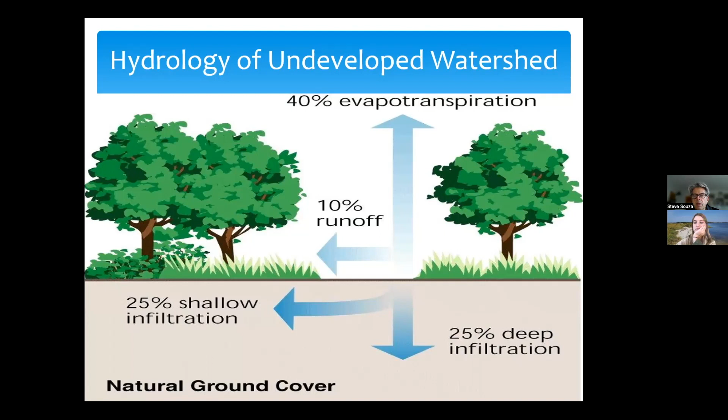You've probably heard us talk about this numerous times before, that when we have relatively undeveloped watersheds, the majority of precipitation that does fall is either infiltrated or lost via evapotranspiration. Very little of that ends up getting generated as runoff. But as we start to develop our watersheds, we end up increasing the amount of impervious cover. That in turn results in less of that precipitation making its way back down into the ground, so a significant decrease in the amount of infiltration and a significant increase in the amount of runoff. And neither one of those things is good for Barnegat Bay.

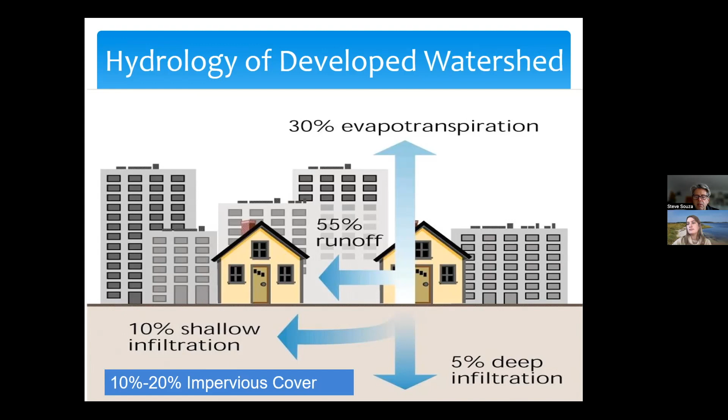Now, some of you may think, well, okay, I need to have really high levels of development to start seeing this, things that you would see typically in more urbanized areas like, say, Toms River. However, that's not the case. This occurs even with as little as about 15% impervious cover, which is on the same level of development as maybe one house to two houses per acre. So typical suburban development, the type of development that we see quite common throughout the entire Barnegat Bay watershed.

So there are various strategies that a lot of you are familiar with in terms of managing runoff. These best management practices, or BMPs, can be divided into three different types of categories. We have gray stormwater, which would be the conventional standard technique, the curb and gutter, where we collect it, we detain it, and then we discharge it, but we don't really do much in the way of managing any of that runoff. Then we have green stormwater best management practices, the type of practices that we've been promoting in Barnegat Bay for the past 20, 25 years or so.

We're really focusing on collecting runoff and keeping it on site as long as possible, either to infiltrate it, to passively treat it through some type of biological process, or maybe even store it and reuse it in some capacity. That ends up providing us with a really great way of reducing runoff volume, decreasing storm surges and the erosion that's associated with that increased rate of runoff, and also removing pollutants.

But there's another category as well, these green-gray stormwater BMPs, which is sort of a hybrid. We're incorporating some of both the gray technology as well as the green technology. And porous pavement falls into that category, a green-gray type of stormwater management best management practice.

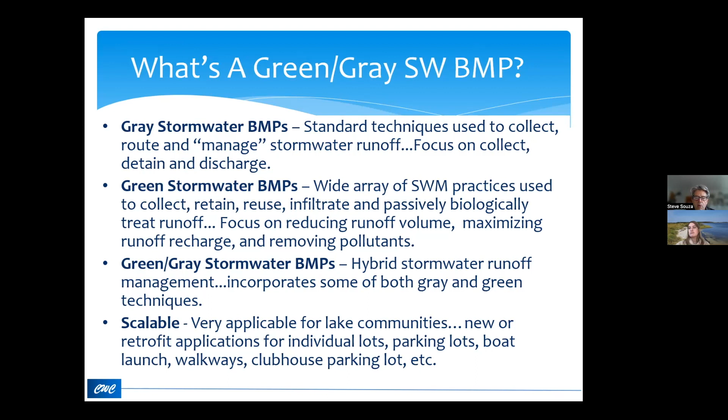So let's take a look at porous and permeable pavement. These technologies have been around for a long time. In Europe, they've been utilized for close to 50 years. And here in the US, definitely over the past 30 years or so. And more so, maybe in the past 10 to 20 years, we're seeing an increase in the use of these types of pavement systems in the more northern portions of the country: New Jersey, New York, Pennsylvania, and New England.

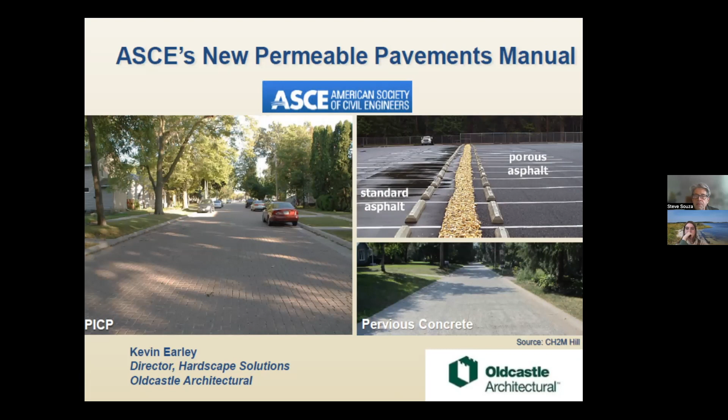There's a variety of different sources of information out there. Within this presentation, I'm providing you with a few. The American Society of Civil Engineers has come out just recently, this document's maybe now about 3 years old, with a manual that deals with all different types of porous pavement, whether it's concrete, asphalt, or pavers. And that's a good starting point for both engineers and for lay people to understand more about what is porous or permeable pavement. Basically, it is the paving material that has the function and structural support that you would associate with conventional pavement, but yet has the ability to infiltrate stormwater runoff.

So it's paving material. Let's think of it with pores that actually facilitate the passage of precipitation from the surface into the ground. In many cases, we can end up with a net positive impact when this is done correctly, in terms of a reduction in the runoff volume. That in turn reduces the amount of pollutants being conveyed. Less volume means less pollutant loading, and that also means less rate, because if we have less volume and it leaves our site more slowly, we've also tamed some of that rate that causes problems with erosion, bank instability, etc.

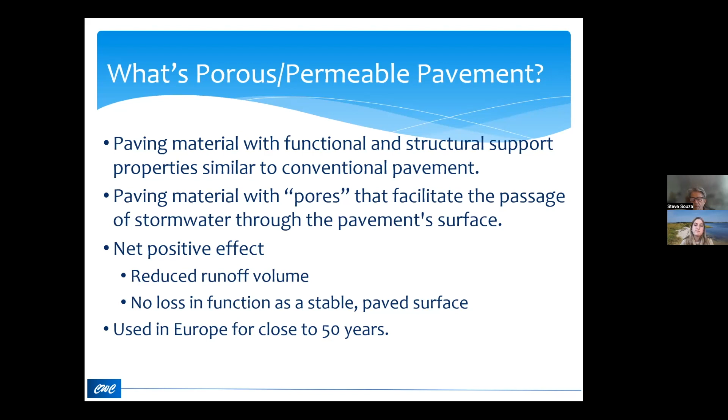At the same time, with the correct application of porous and permeable pavements, we can still have no loss in the functionality of those paved surfaces or the stability of those paved surfaces. And as I mentioned previously, in Europe, these applications have been implemented for 50, 60 years. There are a variety of different types of permeable pavements. I'm going to talk primarily about 4 different applications: porous concrete, porous asphalt, pervious pavers, and eco pavers.

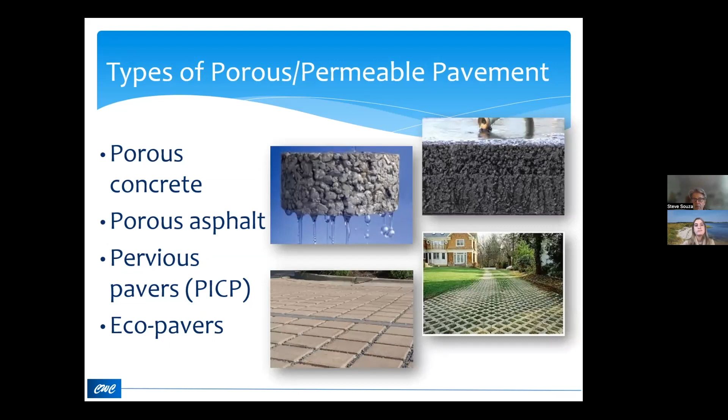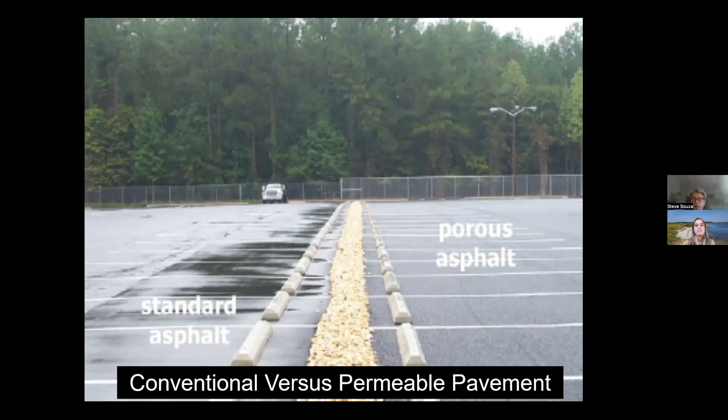The difference, and probably a lot of you have seen slides similar to this, but the difference between conventional and permeable paved surfaces lies mostly with what happens during a rainfall event. On the left-hand side, with conventional pavement, you end up generating more runoff. That runoff leaves our sites faster. There's more contaminants that are mobilized and transported, and there's less opportunity for any of that runoff to get soaked back down into the ground.

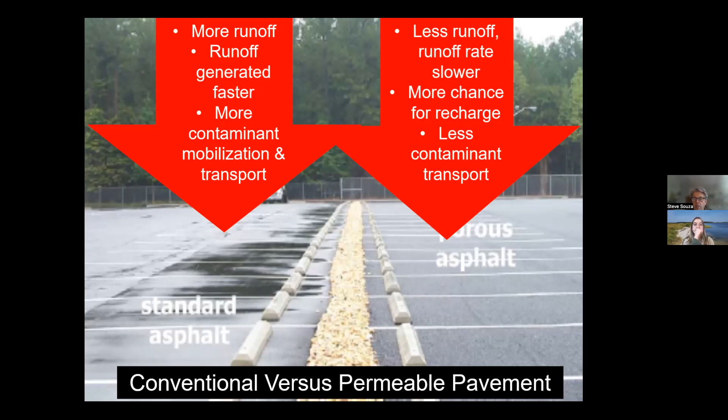On the right-hand side of the slide, you can see this is a portion of a parking lot that has been paved with porous asphalt. You don't have any of that standing water up on the surface. As a result, we have less runoff, because some of that precipitation is soaking down through that pavement. We're generating runoff at a slower rate, and we're increasing the amount of infiltration, so that means we have more chance for recharging the surficial aquifer. The combination of all of that results in less contaminants being mobilized or transported off-site into Barnegat Bay.

Permeable surfaces or porous pavement surfaces can be constructed either with an underdrain or without one. If I have a shallow depth to bedrock or shallow depth to groundwater, less than 2 feet, I'm going to want to construct with an underdrain. That underdrain does facilitate how that porous pavement operates, but it doesn't take away substantially from its overall functionality with respect to reducing volume, rate, or pollutant removal, because typically you would end up taking the precipitation collected by that underdrain and shunt it into maybe a small rain garden or some other type of treatment area.

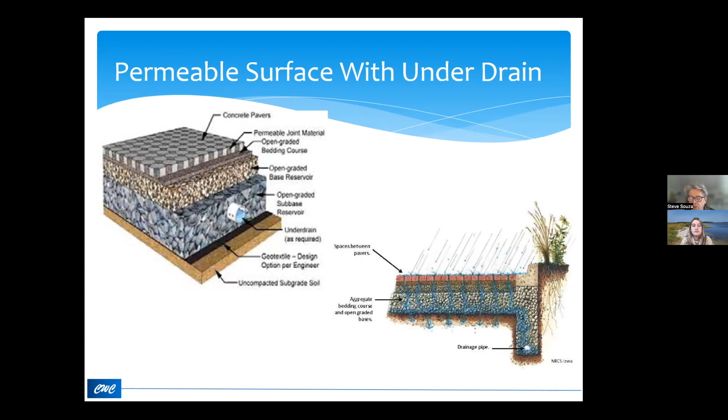If I have proper conditions, I can build my porous pavement site without any type of underdrain, so I'd have ample distance, at least 2 feet from bedrock or from the high water table. As a result, all of that precipitation that passes through the porous pavement and then down into the ground is part of what ends up recharging the surficial aquifer.

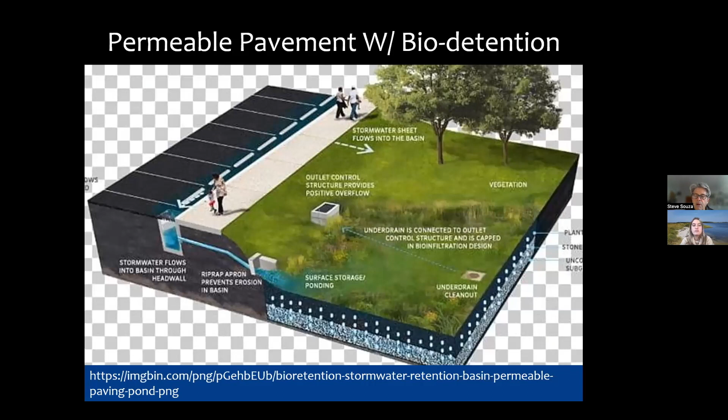As I mentioned, we can do this in very urbanized areas, even areas where I have shallow depth to bedrock or groundwater, by using a combination of my porous pavement with an underdrain and then routing that collected runoff intercepted by the underdrain into some type of biodetention area, whether it's a small rain garden or some other type of vegetated basin. Now, one thing to keep in mind is that all of these techniques, with the exception of the eco pavers, all have shared construction and installation attributes, whether we're talking about porous asphalt or porous concrete or the permeable pavers.

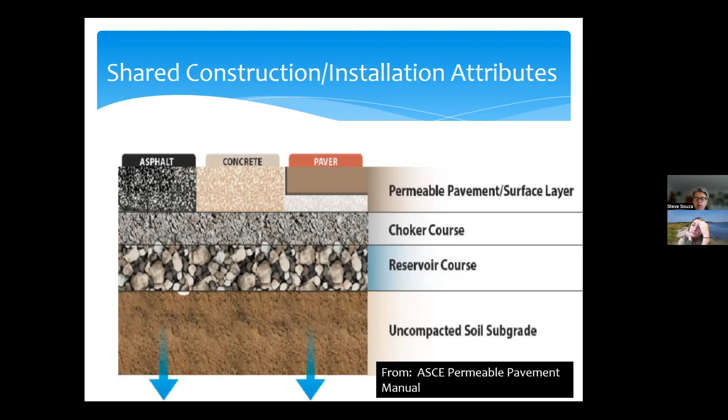Essentially, you have your surface, which would be the asphalt, concrete, or paver, that sits over what's called a choker course. This provides stability to that upper surface, and then a reservoir course that provides the voids within which water can collect and be trapped. Think of it almost like an underground detention basin. From there, that water slowly filters through that reservoir course into my natural native soils, or is collected by the underdrain and then shunted to some type of biotreatment area.

In terms of the thickness of the surface, whether we're talking about porous asphalt or porous concrete, the material itself isn't that different, and neither is the upper layer. It's really the thickness of the choker layer and the reservoir layer that increases as the intensity of use increases, going from a parking area servicing only cars, to a residential street, or even a cartway over which heavy trucks travel regularly. What really changes is not so much the surface layer, but the subsurface layers, so there's commonality with respect to construction and application.

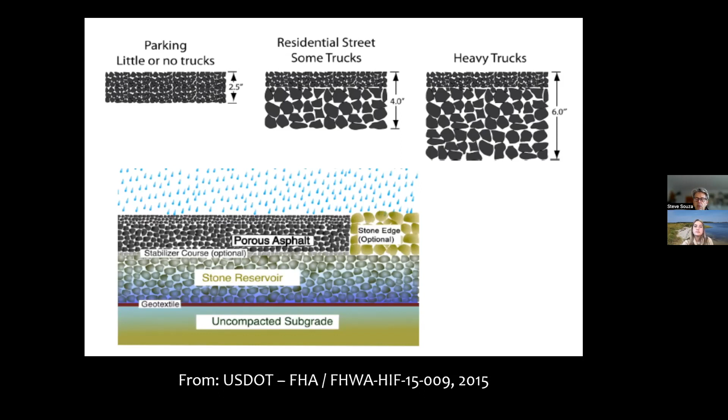At the end of the day, what we're really trying to do, which benefits Barnegat Bay directly, is reduce the amount of runoff we're generating. Less runoff reduces flooding and pollutant loading, and can also allow downsizing of the ancillary BMPs operating in concert with that porous pavement, if implemented as part of a restoration or retrofit application.

I can also decrease the heat island effect, because as precipitation filters down through that upper layer and gets contained and held for a while in the subsurface layers, that helps dissipate heat, so you have less of that urban heat island effect. It's been shown in colder weather environments that you end up with less development of black ice or ice in general, so you have less slip and trip type accidents, and a safer surface.

As mentioned previously, it can be scaled for a variety of projects, whether heavy truck utilization or just nominal use, like in a driveway. Some applications involve recycled materials, and there's a lot of data now showing the service life is very similar to conventional pavement. For those needing LEED credits, porous and permeable pavements do provide value toward achieving LEED accreditation, and this can be done in both cold and warm weather climates, and can be more attractive than standard paving.

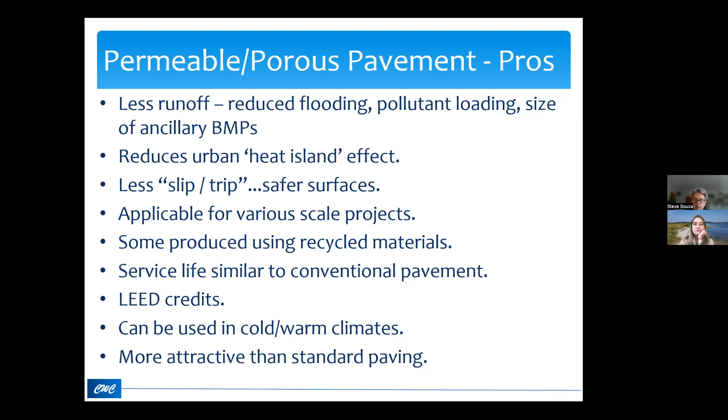Some of the cons, where we see pushback, is a lack of public acceptance, which I think has to do with preconceived notions that these materials are not as stable or will break down more quickly. There's also the fact that initial installation may be a little more expensive than conventional surfaces. They also need special maintenance to prevent clogging, which adds a bit to the long-term cost of these systems.

In high traffic areas, you may find you don't get the longevity of a conventional surface. However, with improvements made over the past decade, we're seeing the longevity is about the same between porous pavement and conventional surfaces. As mentioned before, the application of these techniques may not be suitable if there's a very high water table, or if the soils are very subject to shrink, swell, or frost heave conditions, which is typically indicative of soils associated with a very high water table.

When we use these techniques, particularly porous asphalt and concrete pavement, they need to be installed by experienced contractors. What I've also seen is that because of concerns about longevity and public acceptance, municipal engineers or planning board engineers are often leery about using permeable or porous pavement surfaces.

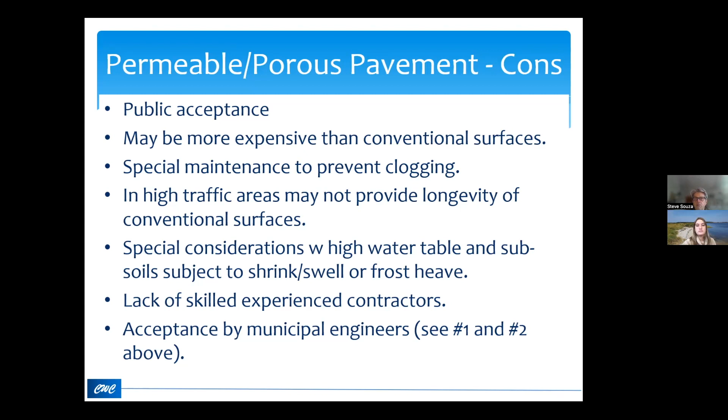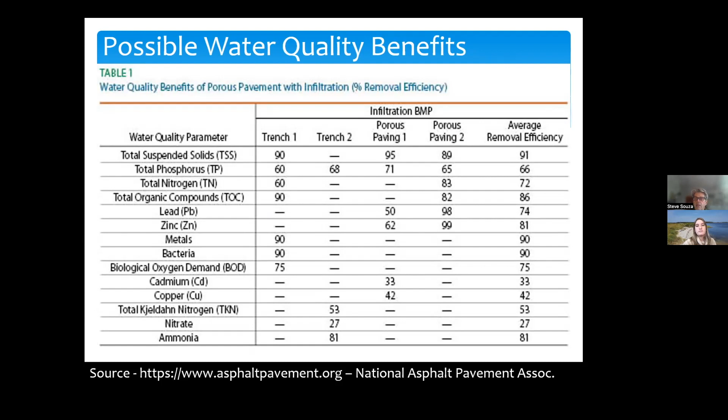There are water quality benefits. This is a table from the National Asphalt Pavement Association, so this isn't coming from some enviro group. This is from the National Asphalt Pavement Association, showing that porous pavement does have the ability, much more so than conventional paving, to remove pollutants as well as infiltrate a lot of that precipitation.

Comparative costs right now are based on 2019 to 2021 data. The material cost for permeable pavement is about 10 to 20% more than conventional surfaces, some of which has to do with transport.

There are not as many sources for this material, so that adds to the cost. The base excavation and preparation costs, though, are very similar, and in some cases could be even less for permeable pavement compared to conventional pavement.

So the offset that I see, and I've seen in applications, particularly an example we'll talk about a little bit later, is that because I'm increasing the amount of precipitation I'm infiltrating into the ground, I'm generating less runoff, so I need a smaller ancillary detention basin or other type of BMP to help manage that runoff.

Now, granted, the maintenance costs tend to be a little bit greater for permeable pavement because they have to be inspected and swept on a regular basis. But accounting for all those added stormwater management costs, permeable pavements tend to be more economical over a 20 to 30-year life cycle than conventional pavement. That information is from a recent report, 2018, that you can check out for yourselves.

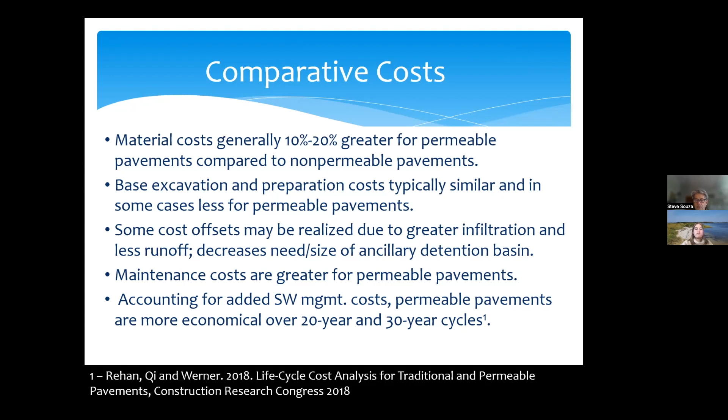So let's talk about the different types of porous and permeable pavements, and then we'll get into an example of application within the Barnegat Bay watershed.

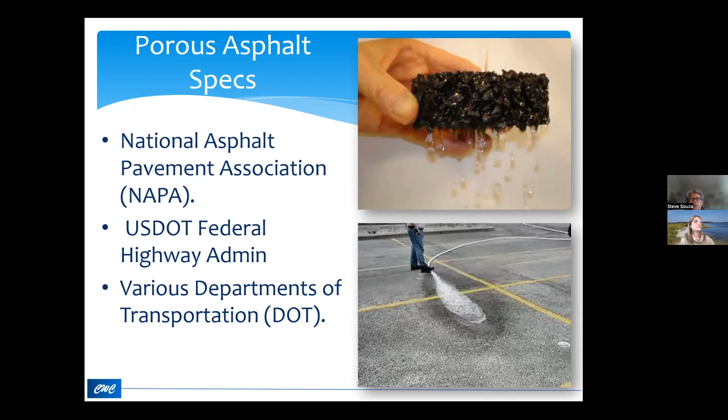There are a variety of specifications for porous asphalt applications, depending on whether it's being used for roadways, driveways, or for parking lots. These are just three different sources for those specifications.

Permeable concrete, again, widely used, I would say probably more so on walkways, small scale parking areas, things along those lines. Essentially, this is high porosity concrete. It does allow for the passage of rainfall into the subsoils.

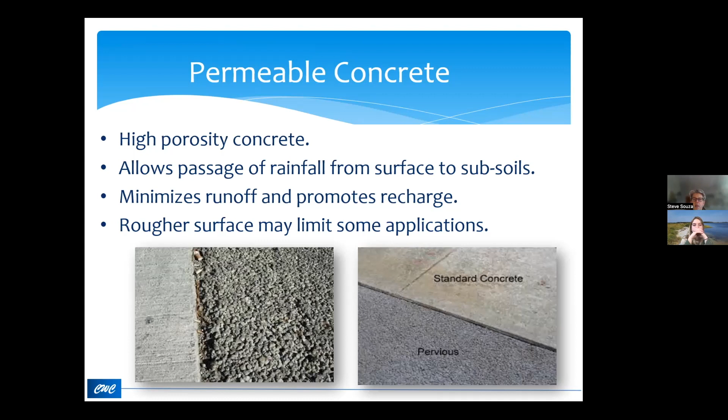The difference here, and you can see this in these two pictures at the bottom of the slide, is that the permeable concrete has a little more of a rough surface than standard concrete, and that's where you may get some public acceptance pushback, because it's a little bit of a rougher surface and it doesn't look perhaps as refined. However, it does have its place in development and redevelopment applications.

Again, similar to the porous asphalt, there are a variety of sources of specifications. This is just a couple of examples, but US DOT, New Jersey DEP, they do provide specifications not only for the material itself, but how to install and maintain those surfaces.

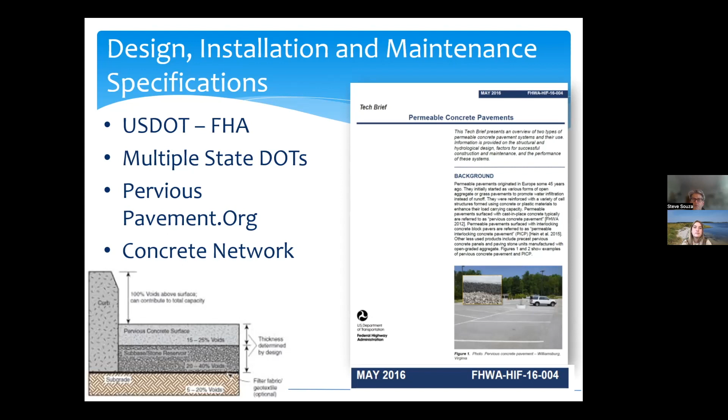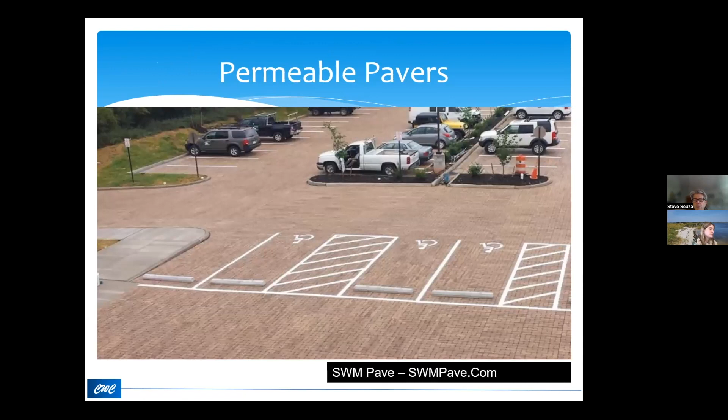And then we have permeable pavers. A lot of you are very familiar with permeable pavers. We've seen a variety of applications, whether it's on walkways, sidewalks, patios, and in this application, even being used in a large parking lot.

As I mentioned, a variety of applications, these can be in a lot of situations. You may have some grass growing between the pavers, or the space between the pavers is filled with some type of additional aggregate. Typically, they are cheaper than standard concrete, but because of the type of application, costs, and labor associated with it, their installation costs may be a little bit higher than standard concrete. They tend to be more expensive, though, than macadam.

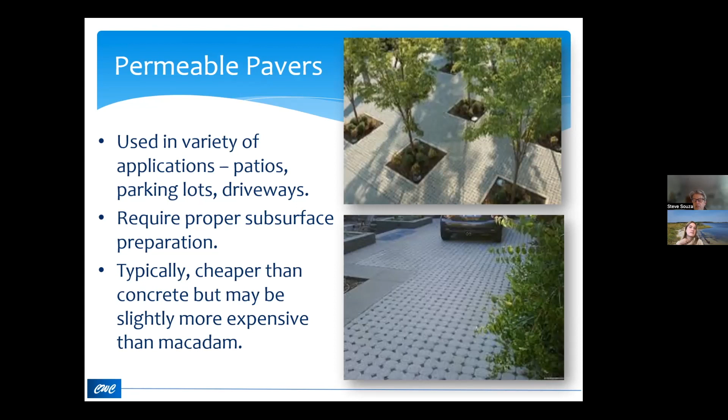However, they do have their place, particularly, I feel, in patios, parking lots, public areas, as opposed to conventional concrete or macadam.

So I'm going to share with you a case study. This is a project that was done at the Toms River Board of Education for the American Littoral Society. Funding for this project was provided through New Jersey DEP's 319H funding program. The scope of the project was to basically demonstrate the benefits of porous pavement, and this is a relatively small scale project, but was being done on a demonstration basis.

Here we had the opportunity to remove 8 conventional macadam parking areas and replace that with a porous concrete. The cost of this project was about $20,000, not extremely expensive, and that included the removal and disposal of the macadam.

Post-installation infiltration rates, we were getting greater than 10 inches per hour, which is about equivalent to the 500-year event. That means I could have this massive storm event and it would be generating no runoff at all. All of that was passing right through that porous concrete surface.

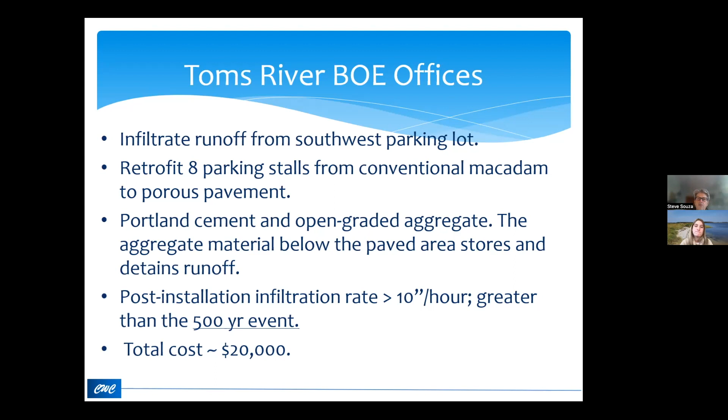This is the site, and those are the 8 parking stalls that were modified.

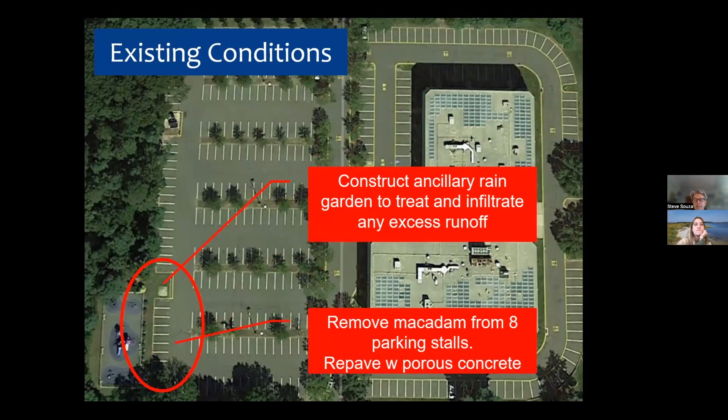We also constructed a small ancillary rain garden to treat any excess runoff. This ended up being sort of like a belt and suspenders application, and in this case wasn't really needed once we did the post-application testing of the new surface.

So we start off with the removal of the macadam, and then the preparation of the base. A big portion of the work being done on retrofit type applications is to loosen up all of that previously compacted soil.

We want those native soils, in this case, which had very high sand content. Naturally we're getting over 10 inches per hour of infiltration. We wanted to loosen all that back up and return it to as close as possible to its natural condition, both in terms of porosity as well as bulk density.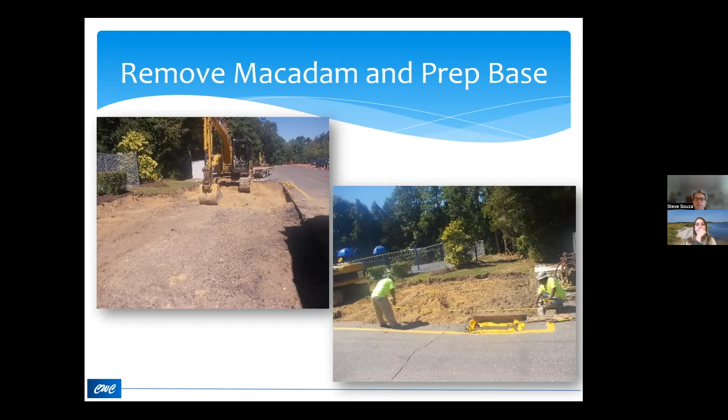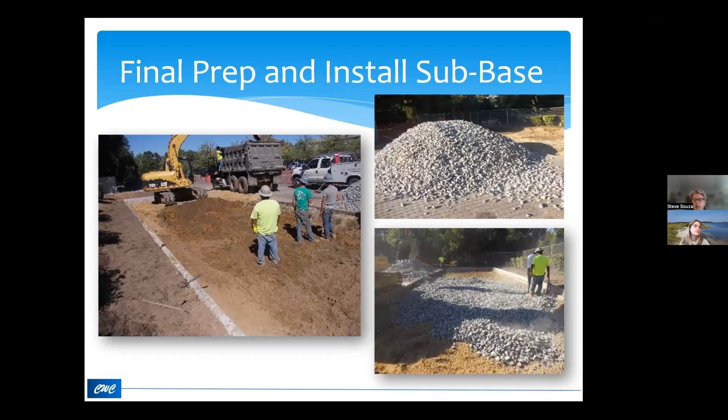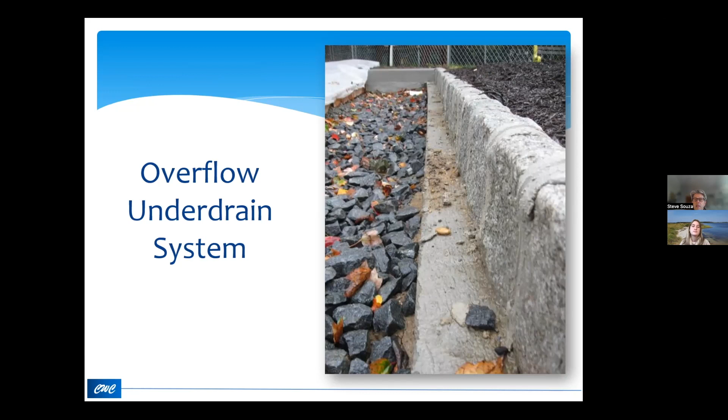Once we had the base prepared, we came in and put that choker base and reservoir base over the bottom of our native soils, again being very careful not to compact those native soils. In this case, since this is being done on a demonstration basis, we did create an overflow underdrain system, but as I'll show you, that wasn't really necessary in this situation. It was included as part of the overall project.

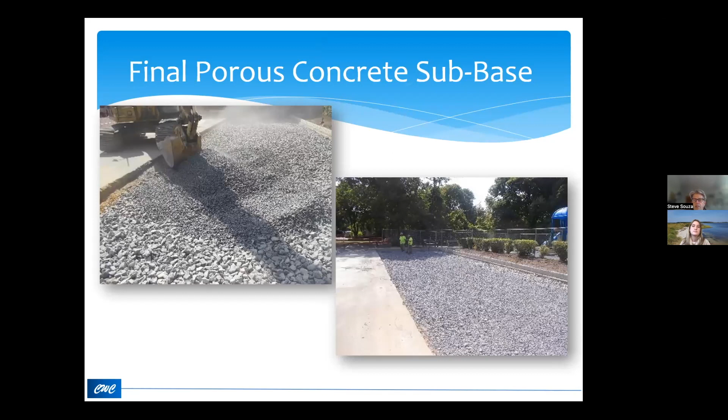Once we had our reservoir base, which is the larger aggregate, we put on top of that our choker base, and then started to lay over that completed sub-base our porous concrete surface. Here's the material being laid out. Once it's in place, it's covered and allowed to cure for roughly about 72 hours or so, depending on temperature.

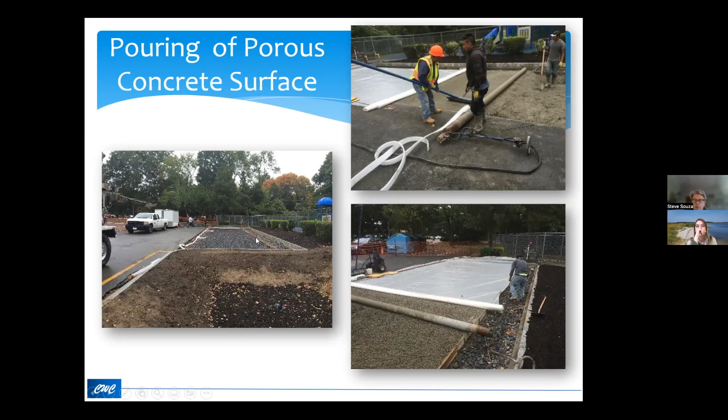You can see here in this particular picture, this is our small rain garden. This is the overflow infiltration underdrain, and that would direct any overflow from these parking stalls into that small rain garden.

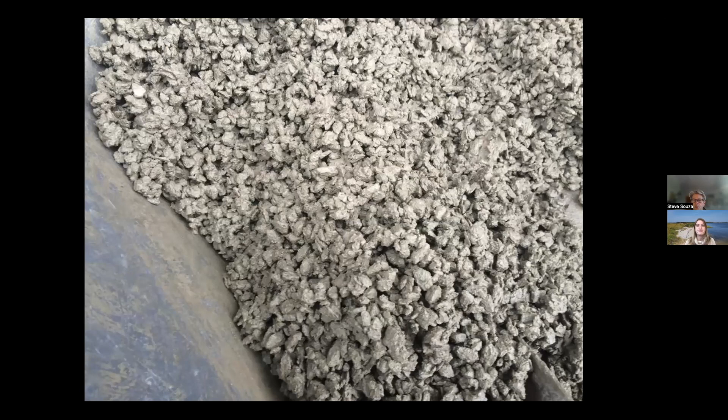Close-up of the porous material once it was in place and fully cured. You can see it has a much rougher appearance than standard concrete. After it was set up and cured, we came in, put in stop blocks, and you can stripe this as you would with conventional pavement.

So again, here's our porous surface, here's our ancillary overflow collection and underdrain system, and here's the little rain garden.

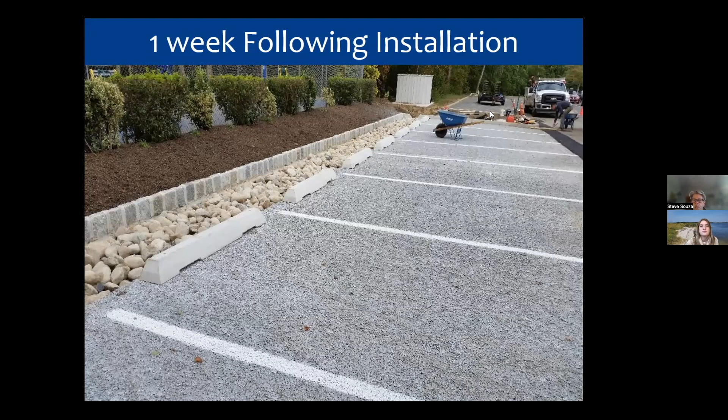This picture I took about 1 week after installation. One thing you should be able to see right here on this slide is all of this material. This is just leaf litter and fine sediment that has been washed off of the macadam roadway in the remainder of the parking lot.

And you can see what essentially happens is that during storms, although we're mobilizing some of that material from this standard pavement, once it enters our porous pavement area, water infiltrates and everything terminates there. That rack line is evidence of water not flowing over the entire surface of the porous pavement and into that underdrain. As I said before, we did post-application testing and showed that it could convey the full volume runoff from the 500-year storm.

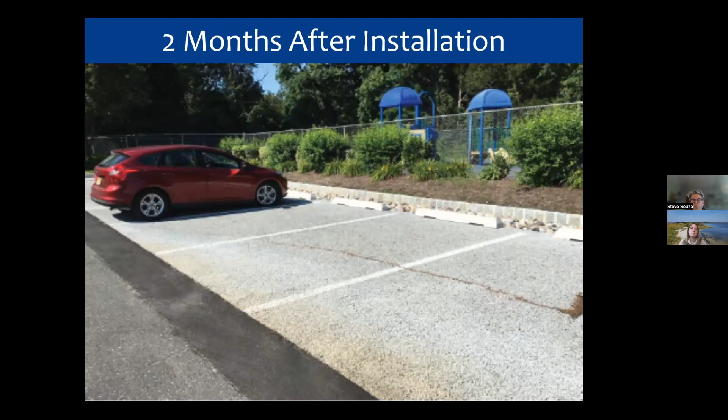The pollutant loading associated with this particular application, we were able to decrease our total suspended solid load by about 95%, decrease our nutrient load in terms of phosphorus by about 80%, as well as decrease our nitrogen load by 80%. Anything we can do to reduce nitrogen loading to Barnegat Bay is extremely important.

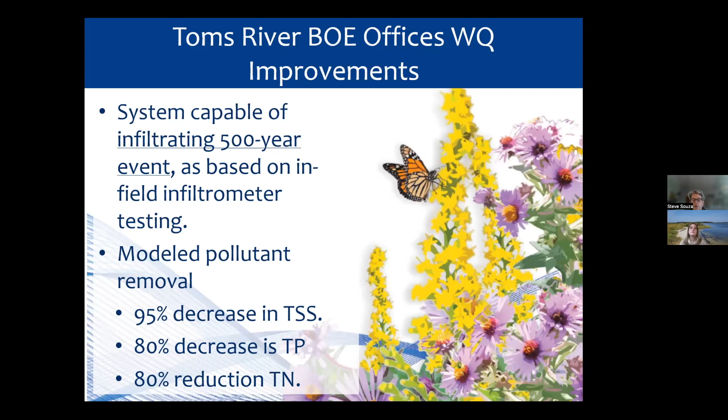Most conventional BMPs can only achieve about 30 to 40% reduction. But once we're able to collect runoff and channel it back down into the soils and let those native soils do what they do naturally, we can achieve very high removal rates for total nitrogen.

The maintenance, as I mentioned before, is a little bit more involved than with conventional pavement. It does need to be inspected, should be on a monthly basis, to ensure there is no standing water, which would be evidence of compaction, and to remove any accumulated debris, and also look for any type of physical damage.

There's no need to apply sand or grit for ice control because we're not collecting water on the surface—it flows right through. So, as I mentioned before, no black ice, less slip and trip issues.

We definitely don't want to apply salts, because that can impact the stability and continuity of that material. We also need to make sure our crews are trained properly to avoid damage from snow plows during winter removal.

In areas with ongoing development, it's a good idea to remove any tracked mud—we don't want fine silts clogging up the surface. And obviously, we don't want to apply any type of seal coat to these materials.

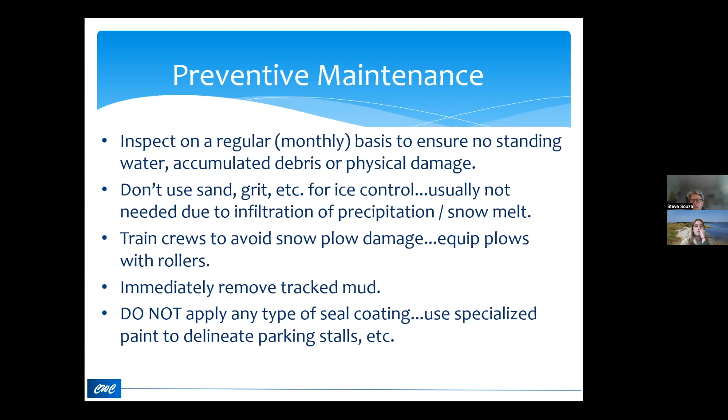In addition, if you're going to stripe the surface, as we did with the Toms River application, make sure you use specialized paints designed for use with a porous surface.

The basic maintenance requirements—DEP has outlined this in the Best Management Practices Manual—involve a biannual inspection of the surface for cracking, subsidence, spalling, deterioration, or erosion. Monthly, you should take a quick ancillary inspection, but on a biannual basis, do a deep-dive inspection of those surfaces.

If you start to see any vegetation growing on those surfaces—typically more of a problem with pervious pavers—that should be removed immediately.

The surfaces need to be vacuum swept four times a year and can be power washed. If power washing, use a system with less than 500 psi, and avoid direct spray on the surface—you don't want to push fines down into the surface, which would add to clogging.

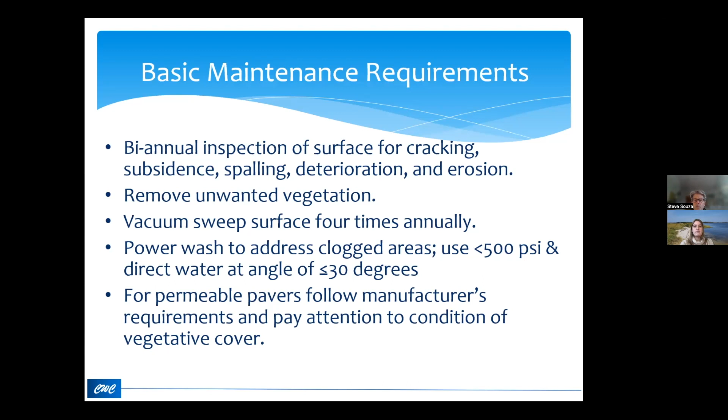Some permeable pavers have specific manufacturer requirements for care and maintenance, particularly with respect to addressing vegetative growth within those pore spaces.

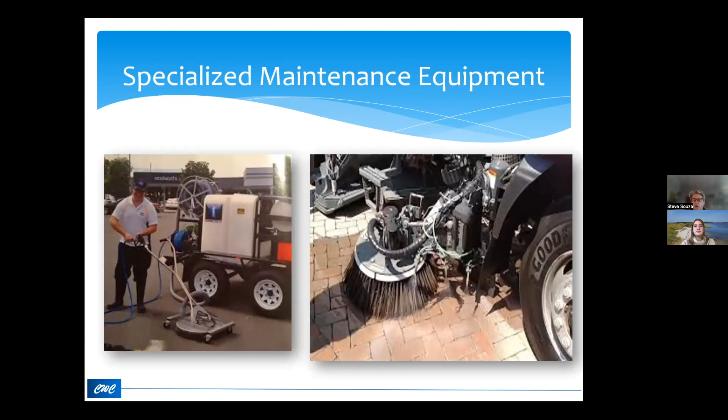This is just an example of a typical combination sweeper with a low-pressure application to avoid clogging of those surfaces.

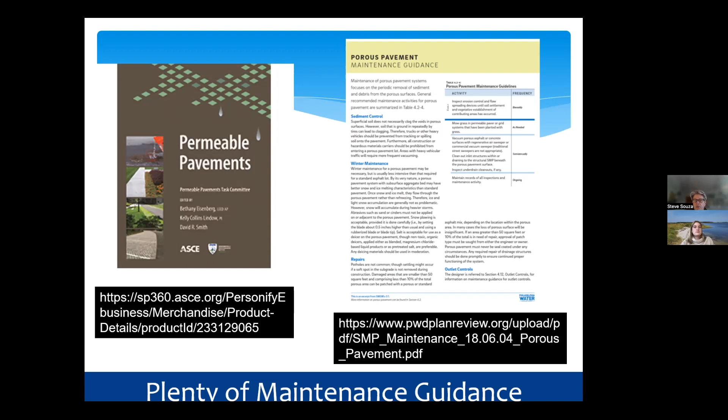In summary, these porous pavement surfaces are an alternative to paved surfaces—a big part of our stormwater strategy for Barnegat Bay. We can significantly reduce runoff volume. When we reduce volume, we reduce flooding, we reduce pollutant mobilization and transport, and we put precipitation back down into the ground, which is critical for maintaining base flow.

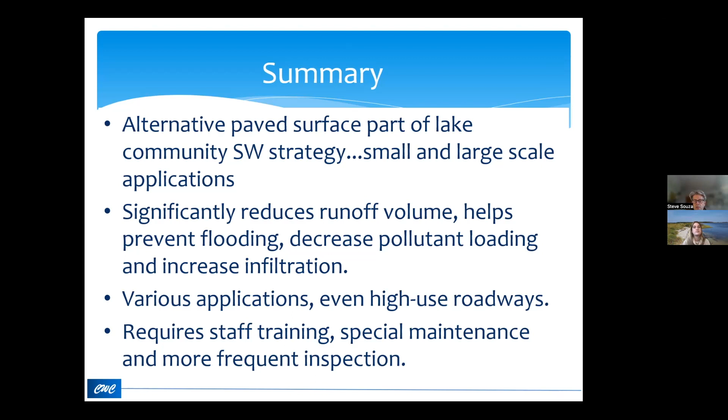There's a variety of different applications, whether porous asphalt or porous concrete, and as shown in this presentation, this can even be used on high-intensity use roadways. Because of the specialized maintenance required, you need to make sure your staff is properly trained and aware of where these types of surfaces have been implemented.